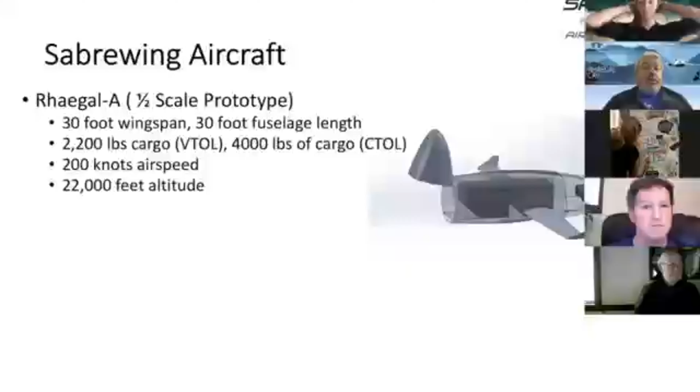I want to offer my congratulations to Dr. Roper and his team for achieving this revolutionary rapid contracting and prototyping method to bring industry and DoD together to develop this new exciting technology with both military and civilian applications. This technology will have great benefit to the needs that we have in Alaska and the Arctic, where conventional aircraft, vehicles, and vessels oftentimes can't operate.

Agility Prime is part of our Defense Department's long history of turning futuristic ideas into reality. I'm proud that the federal government is investing in revolutionary ideas. Agility Prime is leading the way.

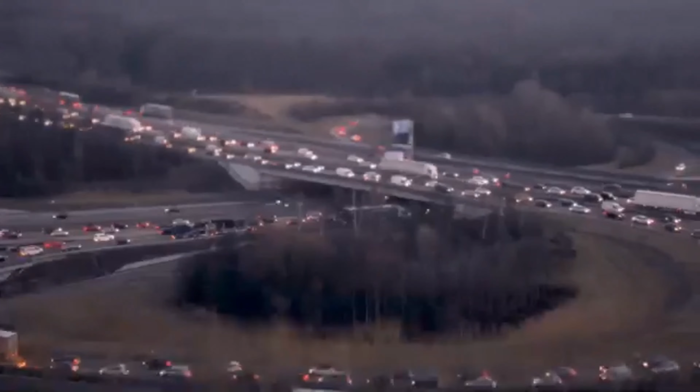This launch of Agility Prime is so exciting. This technology has the potential to make vertical flight more affordable and more widely available. And with the encouragement of the U.S. Air Force and the entire federal government, American companies employing American workers can gain a head start and win a fair share of this lucrative market.

eVTOLs have the same agile, vertical takeoff and landing capability as helicopters, but are quieter and should cost much less to operate because of their electric motors.

We are becoming a trusted innovation partner in commercial tech. I could not be prouder of this initiative. I could not be prouder of this team. And I am excited to see how quickly we can go to help commercialize this market for our nation, so that our warfighters have options they don't have today, and our nation has an economic advantage far into the future.

Innovation is a battlefield, and Agility Prime is just one way we're going to win it. Agility Prime seeks to ensure a global advantage in advanced logistics technology. Agility Prime can reduce the risk of adversarial commercial dominance resulting in military disadvantage.

As the United States Air Force looks at generating combat power away from runways, those distributed logistics aircraft must be runway independent. This new transformative capability is a promising opportunity to conduct that mission in an affordable and scalable manner. Today, we gather for Agility Prime to drive transportation innovation, lower barriers to entry, and expand our partnerships.

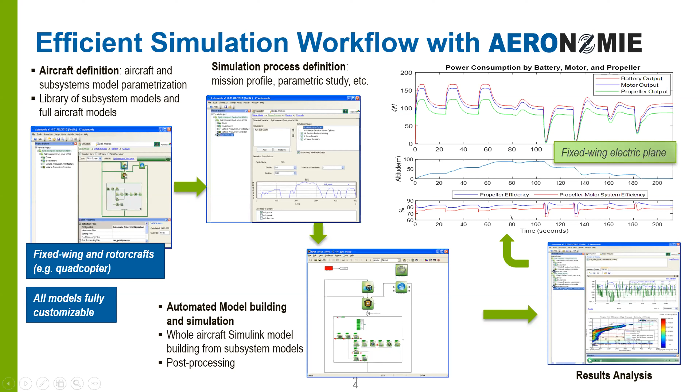In this case, for example, what is shown here is the operation of a fixed wing electric plane. On the top, you have the battery power, motor power, and propeller power, and you can see also the efficiency on the bottom plot here. We also created models for rotorcraft. In this case, it was a hexacopter.

So as I mentioned, we model each of the subsystems. For example, here we have 6 power plants corresponding to the 6 propellers and the 6 batteries.

And we can model the entire flight. This is an example of a mission, a mock-up mission at Argonne, where we go from our cafeteria and deliver sandwiches around the campus. The UAV flies with some gust winds as well, so we can predict the energy consumption, range, and things like that.

The other topic of my presentation here is our CFD capabilities. Our CFD capabilities enable the analysis of the interactions between a UAV or an aircraft and its environment.

First, this is an example of a fixed-wing UAV. It's a Pioneer, a pretty old UAV, but for which published data was available. We use a code called Converge, and we run it on high-performance computing clusters.

That enables adaptive meshing, so there's more mesh cells around points of interest, and that enables us to capture highly complex transient flow phenomena such as tip vortices.

One also very interesting aspect is that we can calculate aerodynamic coefficients, as you can see in the middle figures. This is a comparison between the wind tunnel simulation that was published and our calculations, which are just based on geometry.

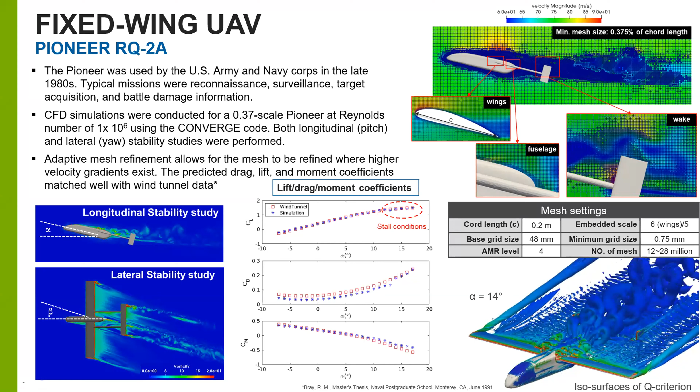And we can use these aerodynamic coefficients to run our system simulation using Aeronomie. We also develop models for rotorcraft.

So these two capabilities combined can help designers, the people who build aircrafts, predict a little bit in the simulation what their aircrafts will do, and maybe find ways to optimize them.

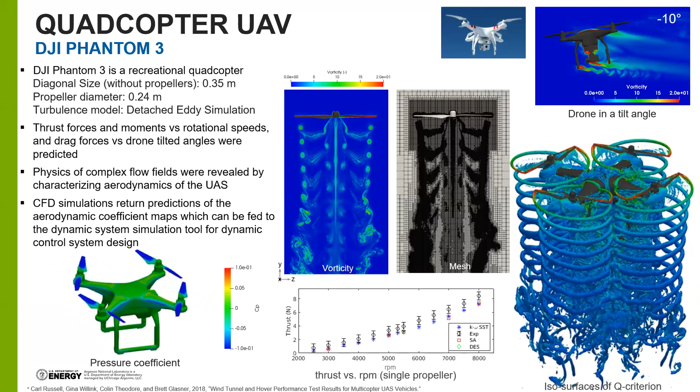Thank you. I'm not sure if the presentation will be shared, but there are contact information and papers, and I think this information, a version of this presentation, is also available on the Agility Prime website, on the Argonne page on the Agility Prime website.

Yeah, for sure. Thank you, sir.

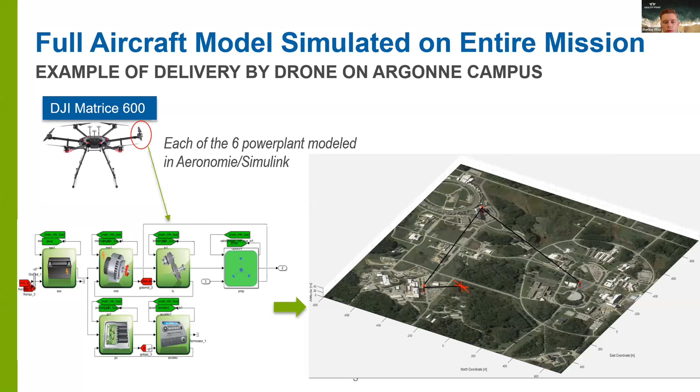That's great. Just one question from me: can you go over the pathways for folks to get involved or to use you guys for modeling work? Who can they reach out to? Does it require a government contract? Can they come in as a private entity?

No, so we're affiliated with the government, but we're not the government. So basically, it depends: if your company is participating in a call, then we can be a sub, a sub-awardee. Or in the case of SBIR and STTRs, we're just providing letters of intent, and then we establish a contract and a sponsored research partnership.

And outside of these, companies are welcome to also work with us and develop something. We can come into an agreement for a contract to perform work for these companies, and also sometimes we perform research without exchange of funds, but more with exchange of capabilities, often data. So we can find mutually beneficial research where maybe we develop new models that would benefit generally the overall community, but would also be of particular interest to a particular company, or customized to the needs of that particular company, for example.

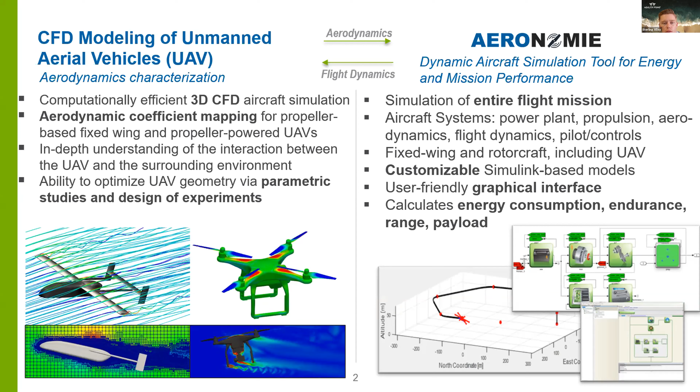Sure. Well, thank you for your time today. It was an informative presentation, and I appreciate you coming on. I think we're now going to switch over to Danielle McLean from Happy Takeoff.

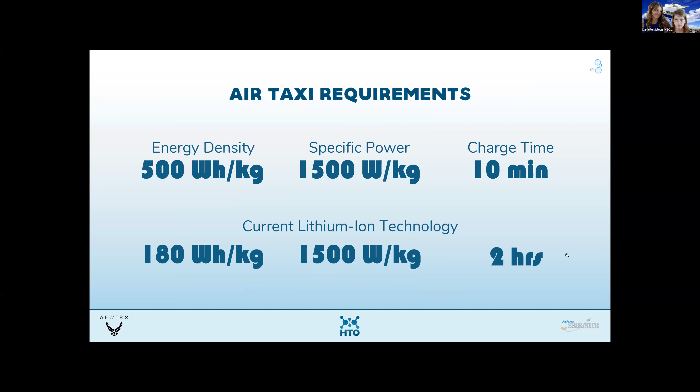Hi, at Happy Takeoff we're very interested in hydrogen, and we're going to flip through these slides pretty quick because we want to give our team members time to talk about our technologies and vision. This is why we're interested in hydrogen: lithium ion is terrific in certain use cases, but the higher energy density of hydrogen fuel enables longer flight times and quicker refueling times. We think the longer flight ranges will translate into a lower cost for implementation of infrastructure.

So when we started looking at hydrogen, we pursued this from the infrastructure perspective. There are several of our friends and other companies working on awesome hydrogen fuel cell designs, like Zero Avia, Alakai Skai, Bartini, just to name a few.

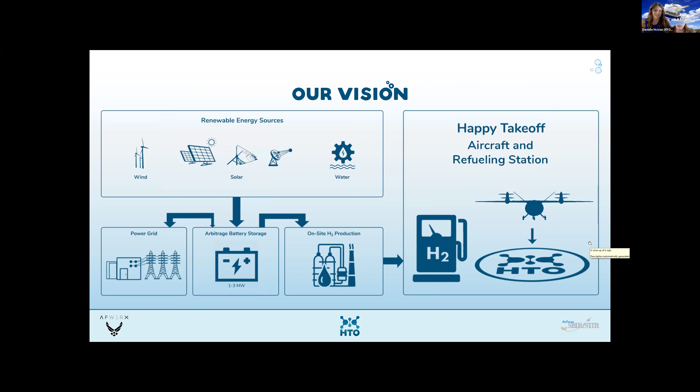So our vision is to implement captive use hydrogen, meaning we make it on site. And with that, I'd like to let Daryl Cummings talk a little bit. He's our lead aircraft designer.

Daryl, are you with us? We had trouble getting Daryl's audio working earlier, so Daryl, if you are here, feel free to cut in and interrupt me. But meanwhile, I'll go ahead and talk a little bit about PRISM.

We are so very excited to introduce PRISM. As Rachel said, we were looking at infrastructure from the beginning, trying to find what the gaps were, what needed to happen for eVTOL to proliferate everywhere. We saw that infrastructure was a really big constraint, especially when we started talking to cities and states. They weren't really too keen on the idea of putting a landing location every 10 miles or so. So we were putting our brains together trying to think how we can minimize this infrastructure needed, and what we came up with was we need longer ranges, obviously.

So then that converged to hydrogen pretty quickly. We were looking at who has this kind of vehicle that meets Uber's requirements, that meets what the Air Force is trying to do. While we're really impressed with some of the designs, like what Alakai is doing, and Zero, and Bartini, some of the other hydrogen aircraft, they're not fixed wing aircraft. This is a fixed wing aircraft. The wingspan is pretty small compared to some of the other ones, so it's got a low spotting factor. We're just really excited to announce her, and it's got a range of over 250 miles.

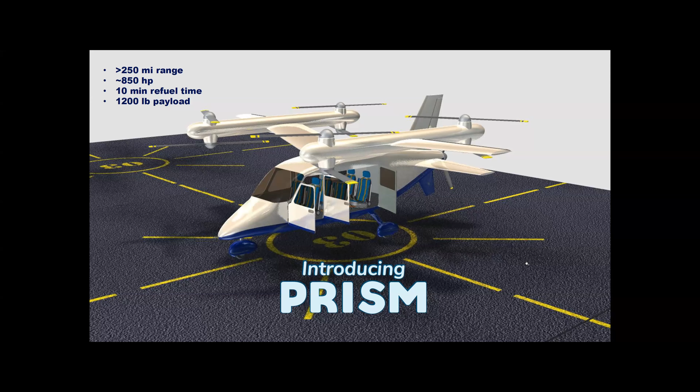I don't know, it's an ongoing kind of inside joke with us. We're just having a little technical difficulties. I think Daryl's internet is having some problems today. He's with us in spirit though, and we will hear from him soon.

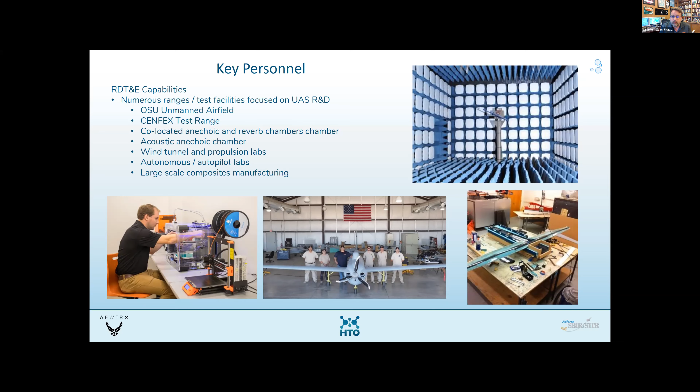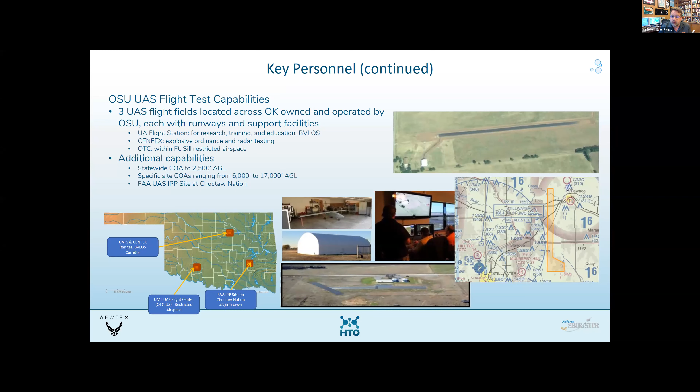This shows another example of some of our systems, but we have several flight test facilities that will be available for the program, allowing us to test at different stages of the project, including the OSU Unmanned Aircraft Flight Station, which has runway and hangar facilities, as well as a beyond visual line of sight corridor. We are partners with the Choctaw Nation FAA UAS IPP test site in Southeast Oklahoma that covers over 45,000 acres and has hosted other AAM vehicles. OSU also owns and operates a UAS test facility within restricted airspace at Fort Sill for government-only customers.

Finally, our point of departure vehicle is going to be based around our BFD platform, which has a similar 8-rotor configuration to the Prism, allowing us to quickly demonstrate the flight control and dynamic systems of the proposed platform with minimal cost and time. Once this is demonstrated, we can easily scale up to larger platforms as program requirements mandate.

Thank you, Danielle, thank you Dr. Jacob. I don't know what we're like on time, but if we got that done in 10 minutes, I'm really proud of us. Yeah, for sure.

Thank you, Danielle, I just had a little bit of question on your STTR collaboration with OSU. Is the BVLOS drone hydrogen as well, or? It can be, yeah. We currently have a hybrid system that's using both fuel cell systems that are hydrogen based, as well as other hybrid technologies, so we can quickly adapt to that.

Sure, thank you. Unless there's any other questions from the Q&A, let me check. Yeah, so I have one from Bill Kleinbecker: is OSU involved with the 5G early sites, anything to talk about there? Nothing that I can share at this time.

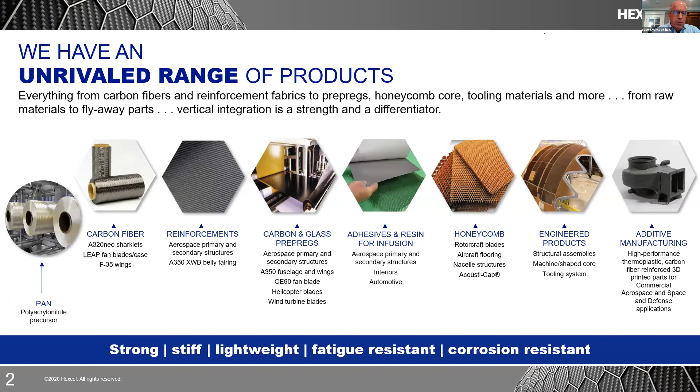So Hexcel is, as I mentioned, an integrated material supplier. We produce everything from the pan precursor, carbon fiber, reinforcements, a variety of woven fabrics and prepregs, adhesives and resins, and a number of other capabilities, engineered products. We also have an activity in additive manufacturing that I'll explore. We also are the largest supplier of honeycomb core in the world.

In terms of the US, we are headquartered in Stamford, Connecticut, and then have a number of sites that I'll go over briefly. I am based in Salt Lake City, which is our largest operation in the US. In Salt Lake, we produce all of the carbon fiber and all of our aerospace prepreg materials. Going from left to right, up in Washington State we have engineered core facilities - this is a facility that helps shape the honeycomb core to the shape that you need for your application. Then an engineered structures group just outside of Seattle that can produce all types of composite structures.

We have our R&D facility in Northern California. We produce our honeycomb in Arizona. We produce our industrial prepregs, mostly for the wind energy market, in Colorado. We have full weaving and fabric capabilities in Seguin, Texas. We develop our pan precursor in Alabama. We also have another engineered core facility in Pennsylvania, headquarters in Connecticut, and our additive manufacturing operations are also in Connecticut, and a group up in Massachusetts that deals with RF and electromagnetically tuned materials.

So when we look at the UAM industry, there are business requirements and customer requirements there. And what we find is that this industry needs higher build rates than the aviation industry does today. If the industry fully develops, it'll start to approach automotive build rates.

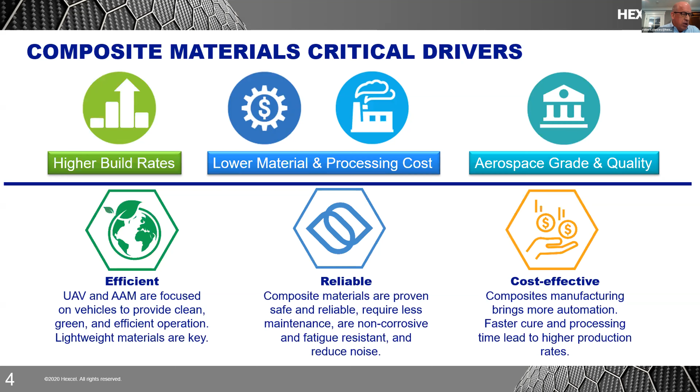We talked about the different propulsion methods, electric, hydrogen, but all of those will need a lightweight structure in order to be most efficient. These structures need to be reliable, and composite materials are reliable and have been used in the aviation industry for decades. But they also need to be cost effective and have the ability to scale to the large volume production that is required.

So let me just talk about some of the different technologies that we provide. We are the largest producer of aerospace grade carbon fiber in the world. We kind of bucket these in three main categories.

High strength, lower cost fibers we designate as our AS fibers. Then intermediate modulus fibers, those are primarily used for primary structure in aerospace today, designated with the IM designation. And then high modulus, which have very high tensile modulus but a little bit lower strength generally, used for a lot of satellite and space applications.

All of these carbon fibers are produced, including the precursor, in Alabama, and then the carbon fiber production in Salt Lake City.

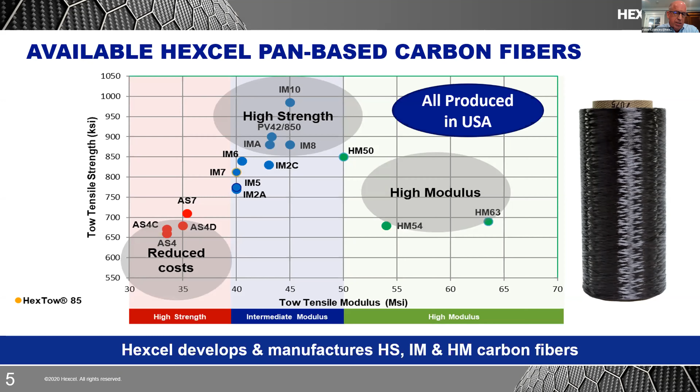We've been involved primarily in the aerospace industry, but have been quite involved in the automotive industry, especially for Formula One racing and those types of activities. We've worked with the automotive industry for many years to be able to look at the kind of production volume rates that they're used to.

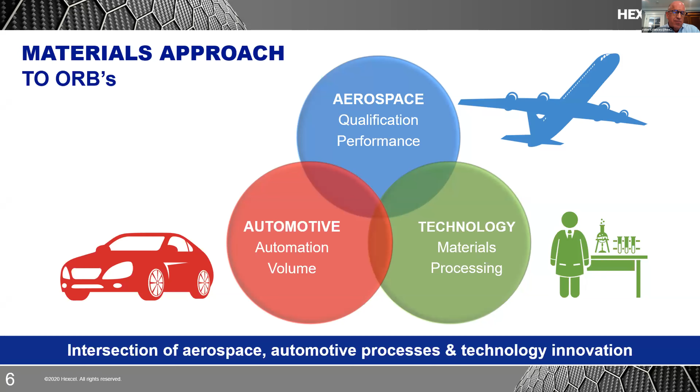We've been very involved in aerospace. We understand the qualification, certification, and performance requirements for aerospace. And we have a very active technology R&T activity. So what we see for the UAM industry is really combining all of these, the aerospace quality with the automotive rates, and having a robust research and technology focus to be able to develop the materials required for this industry.

If you look at composite materials today, they're primarily thermoset prepregs. Thermoset materials are a plastic resin that requires temperature to set, and once it's set, it's permanent. That's primarily what the aerospace industry uses today.

But there's been a lot of interest in thermoplastic materials because they don't require the type of processing equipment you need for thermosets. There's more opportunity for automation and faster rates. So we formed a partnership with a French materials chemical company, Arkema, a couple of years ago to develop really world-class thermoplastic prepregs.

We're actively working on that, and we'll actually have a webinar next week on that topic with thermoplastics, so stay tuned for our continued efforts in thermoplastic. Our fibers have some unique advantages for thermoplastics, and our fibers, whether thermoplastic or others, are generally the fibers used in these thermoplastic prepregs.

As mentioned, in our involvement with the automotive industry, we've developed a lot of more automated and faster processing materials. So we have materials well suited for automated placement machines, liquid composite molding, quick cure composites, out of autoclave composites, additive manufacturing, compression molding, pultrusion, thermoplastics, welding, and joining. We have all of those capabilities within Hexcel.

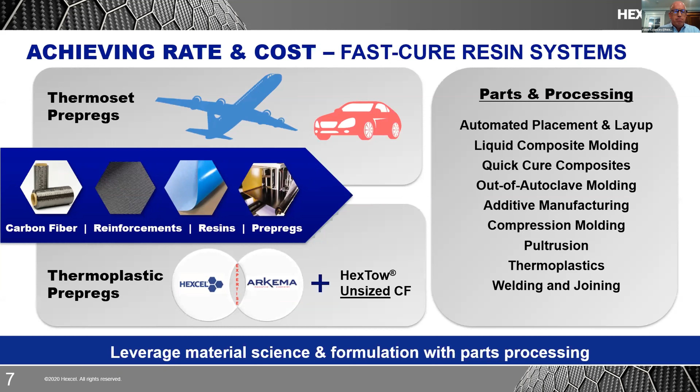We're also the largest producer of honeycomb, and one of the unique advantages we have is that we've developed honeycomb materials able to dampen acoustic vibrations. Our honeycomb materials are primarily used in engine nacelles because the honeycomb material dampens the noise coming from the engine, which is good for those outside the airplane, but also good for the passengers inside.

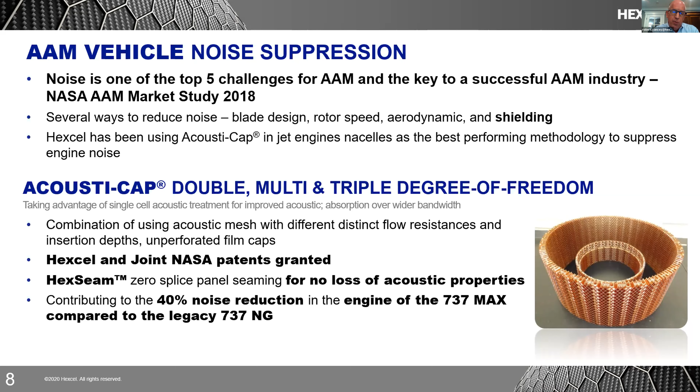We're actively working with our expertise in acoustic absorption materials to find ways to lower the acoustic signatures of advanced air mobility. We know that's a major issue that needs to be solved in order for these vehicles to be used widely in urban environments.

I mentioned additive manufacturing. We produce additively manufactured parts in our Hartford, Connecticut facility. This uses an SLS process, selective laser sintering. It uses a high performance thermoplastic powder, PEKK, provided to us by Arkema, loaded with milled carbon fiber, which provides extra strength and stiffness to the material. It has some advantages in terms of electrical conductivity, and we solely provide these parts to the aerospace community.

We have active partnerships with most of the aerospace OEMs and the DoD. These materials are certified for flying and are flying on vehicles today, and we're actively continuing to develop the design allowables for the newest generation. We have a current activity funded by the FAA to further qualify and certify this material. We have customers today in the orb industry and look at this as an exciting technology, especially to replace metal castings or for very complicated geometries where tooling costs could be prohibitive. This is an easy way to get those types of geometries produced in a lightweight fashion.

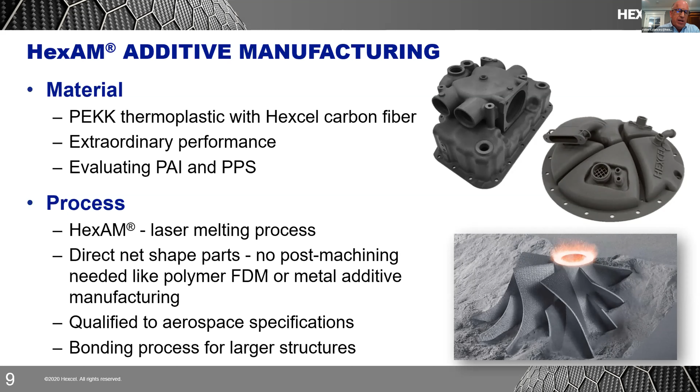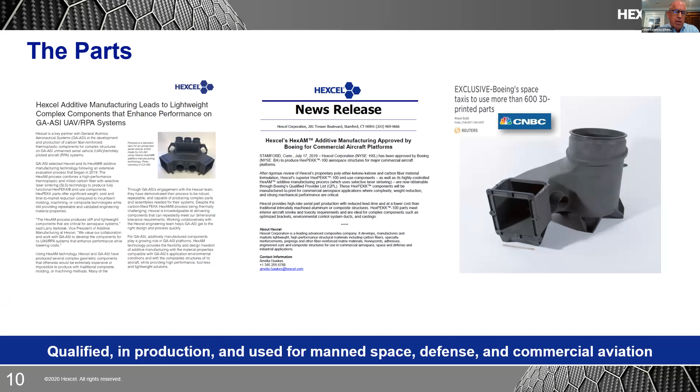There's some information on our website, I'll just point out some highlights. We've been actively involved with General Atomics over the last few years on their UAV systems and have a published case study with them. Another news release came out last year on being fully qualified for Boeing Commercial, and we've been in the press on a number of things, including an interview on CNBC. So it's a qualified additively manufactured process that's in production and used for manned space, defense, and commercial aviation.

If you look at primary and secondary structures, they are generally stiffness driven and crashworthiness driven. So thermosets are traditionally used there, but we've developed a lot of quick cure thermoset materials and out-of-autoclave materials so that production rates can be satisfied. Generally they use an intermediate or high modulus fiber, and thermoplastics is also an emerging area of interest for that.

If you look at the rotor blades, they need to be damage tolerant. Generally there's braiding or fabrics used with intermediate modulus fibers, and infusion resins are an effective way to manufacture those blades at scale. If you look at frame structures, they're stiffness and strength driven, and pultrusion methods are excellent because they're low cost and can be produced in large volumes.

If you look at the interior, they need quick cycle and reduced labor technology. We just recently introduced a new thermoset resin system that meets the flame, smoke, and toxicity requirements by the FAA, so it's suitable for use in interior systems. For brackets, ducting, and complex shape components, additive manufacturing or molding infusion processes are applicable. In terms of parts manufacturing, you need quick cycling, reduced labor, and tooling, so things like liquid composite molding, compression molding, and infusion are appropriate there. And for engines, nacelles and ducting, our honeycomb acoustic suppression materials apply.

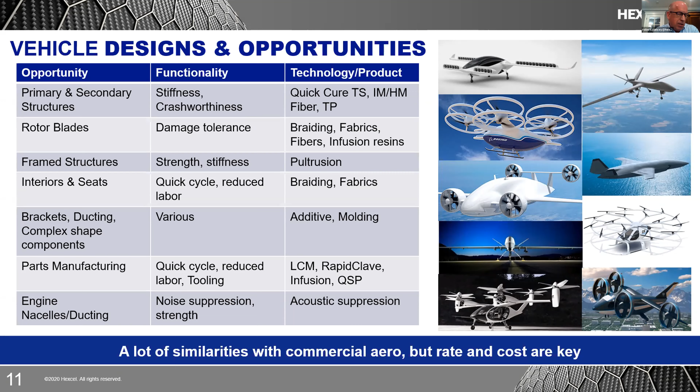There's a lot of similarities between the orb industry and the commercial aero industry, but rate and cost are key. So we continue to be actively involved in developing materials and processes to meet the rate and cost requirements of the orb industry. In summary, materials challenges for the orb industry are that different solutions are available for different missions and different mechanical property specifications. So if it's an unmanned system, it has different requirements than a manned system.

Hexcel is a global leader in advanced composite technologies in aerospace and automotive. We have a wide breadth of material and engineered structure solutions for the orb industry. We can provide the materials, we can provide the structures, we can help with the engineering, we can provide all of your composite materials structures needs. We're happy to engage with any of you out there developing concepts who need a strong, trusted domestic partner to provide your composite materials solutions.

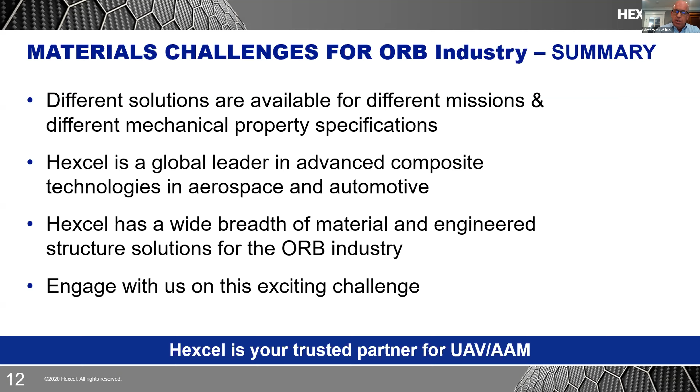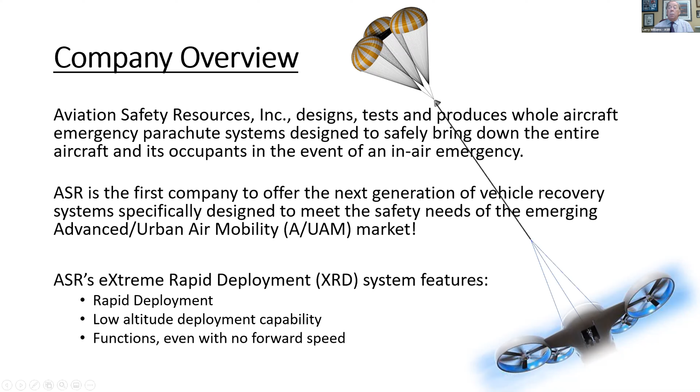It features a very rapid deployment. It also will work at a very low altitude, and it will function quite well even if there is no forward speed to inflate the parachute canopy.

As everyone knows, there's over 300 different vehicle designs underway right now. Our system is designed to bring a level of safety to these vehicles and give a means of recovery, especially in the VTOL environment. There's no other system out there today that'll work in that VTOL environment as efficiently. We are also working with both unmanned systems as well as advanced air mobility and manned aircraft.

Our products are also lighter weight. They have a lower cost and lower operational cost with a repack cycle of 15 years that lowers the total cost of ownership over the life of the system. Our XRD system is the essential recovery system specifically designed to increase safety, and by increasing safety, we feel we can lower the design, testing, and operational cost, and ultimately lower the risk associated with these new vehicles.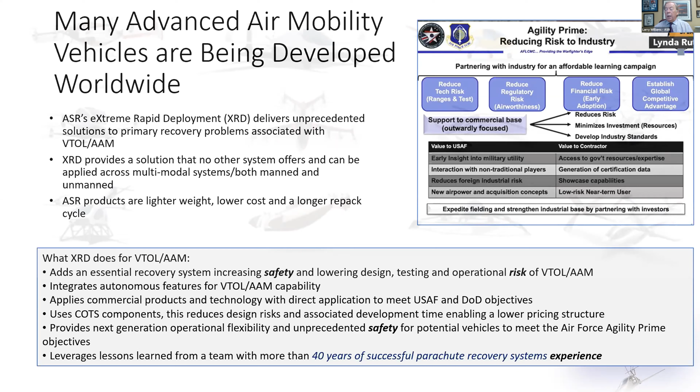So we integrate various components that we've used for years, and we've applied commercial solutions along with brand new technology to help bring about a new type of vehicle recovery system and give the operational flexibility needed in this urban air mobility or advanced air mobility market, in line with the Agility Prime objectives and what the DoD itself is looking for. We've got a team of people with over 40 years of experience developing recovery systems, and we've taken advantage of that experience to develop what we call the next generation of recovery.

There are parallels with what we're doing and what you see, for example, in automobiles and how airbags ended up really changing the injury mechanisms and safety elements associated with automobiles. Airbags became mandatory around 1998, and the National Highway Traffic Safety Administration estimates that by 2015, almost 45,000 lives had been saved with the use of that technology.

Now, if we transfer that over and look at aviation, the baseline aviation accident rate for general aviation airplanes from 2001 to 2005 was 7.97 accidents per 100,000 flight hours. By 2016, there was a 57% decrease in that accident rate down to 3.45 accidents per 100,000 flight hours. What this means is that technology matters.

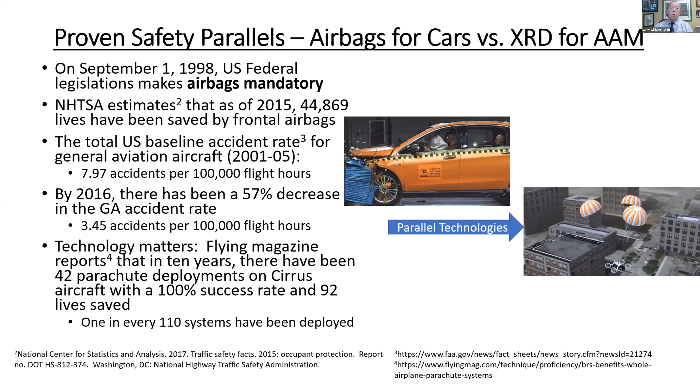Flying Magazine did an article a few years ago that said in 10 years, there had been 42 parachute deployments on Cirrus aircraft with a 100% success rate and 92 lives saved. And incredibly, 1 out of every 110 systems that have been installed have been deployed.

So we feel like aircraft designers need the solution that we bring to the table today. For example, we talked about automobile accidents. There's nearly 15,000 fatalities in automobile accidents across the country every year, but that's become socially acceptable. We accept that level of risk. But if you look at it, even just air taxi accidents, which average only 18 fatalities a year, every accident makes national news, sometimes international news.

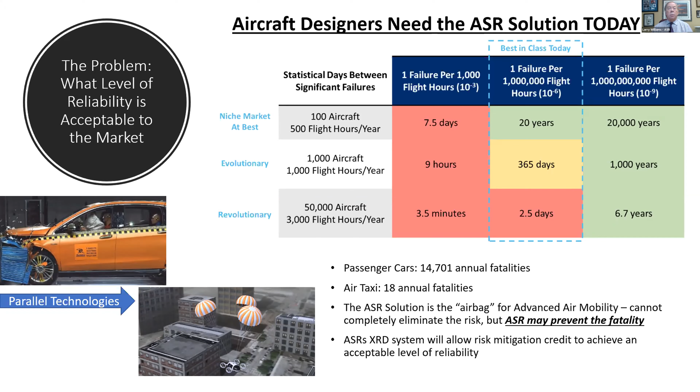So our solution is designed to help the market in advanced air mobility. We can't prevent the accident, but we may be able to prevent the fatality by giving another level of safety if something goes wrong. And in the design, you could use the parachute recovery system as risk mitigation credit as you're designing the vehicle from a safety standpoint. Our concern is that if there were to be an accident in the early stages of development of the entire program, it could significantly delay the program completely.

Look at the impact of the Virgin Galactic accident that occurred. Look at the impact to Uber on the self-driving cars and the accident in Arizona that killed a woman on a bicycle. And more recently, the Kobe Bryant accident, of course, was worldwide coverage.

So we feel like we can offer an integrated solution that can be built into the design of the vehicle to give another outcome by allowing a parachute recovery system to safely bring down the vehicle in the event of an in-air emergency.

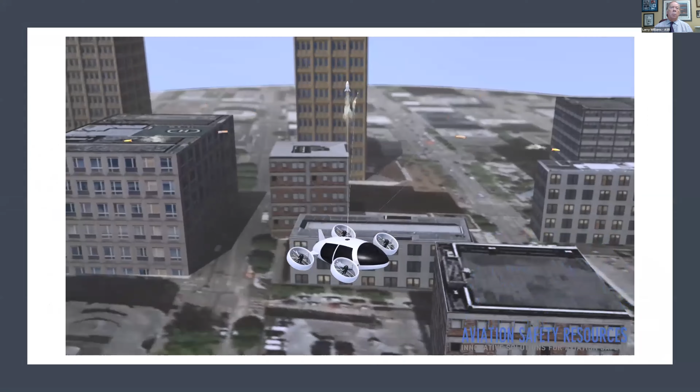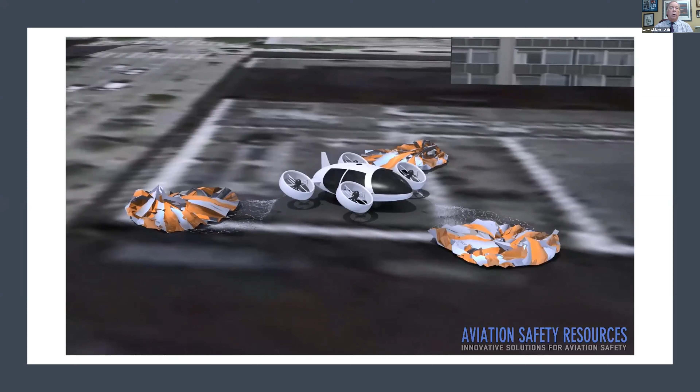Now, the way our system works is we use a retro rocket to slow the descent of the vehicle, and then we deploy multiple small parachutes, and we've calculated and figured out a way to inflate the parachutes on deployment. Therefore, we can deploy very, very rapidly. We can recover the vehicle in about 100 feet, and in less than about 2.5 seconds. So technology really matters.

Conventional recovery systems have been around for nearly 4 decades. More than 500 lives have been saved with these systems, but they will only work effectively with forward speed to inflate the parachute canopy. If you don't have forward speed and you're in a vertical takeoff or vertical landing configuration, the only way to inflate the canopy is with altitude loss. This is not a capable solution in this environment.

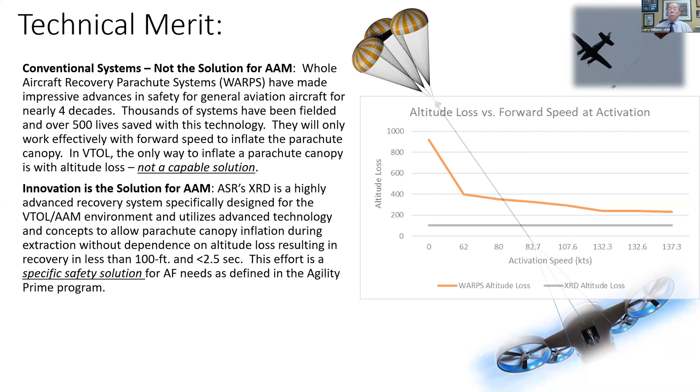So what we've done is we've specifically designed a system that utilizes advanced technology and concepts to allow us to inflate the canopy during the extraction. Again, we can limit the altitude loss to less than 100 feet in about 2.5 seconds. So this is a very specific safety solution that the Air Force needs as defined in the Agility Prime program.

So in summary, we feel like we have advanced technology which will contribute to a mission need under this Agility Prime program. And by equipping these vehicles with this onboard safety system to mitigate the risk, it saves the assets, not only in the air, but also reduces the risk on the ground. We can accomplish this recovery and bring down that vehicle and its occupants where literally they can release their harness system and walk away.

So we're a primary solution for the advanced air mobility market. We've established a relationship with Agility Prime, and we're looking for other vehicle OEMs that want to work with us to incorporate this important safety feature into part of their design. So with that, I'll close, and I'll be happy to answer any questions about our system and what we do.

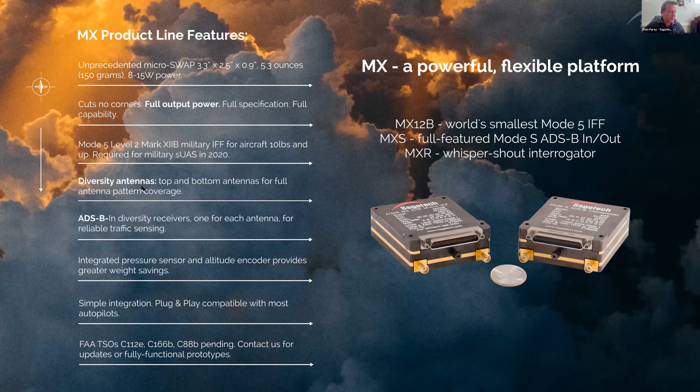We have a third version of this, which is sort of the inverse—it's a whisper shout interrogator that can interrogate other aircraft transponders. That combination of capability in a single platform makes it ideal to create a full detect and avoid solution for UAS, for UAM, and for AAM aircraft.

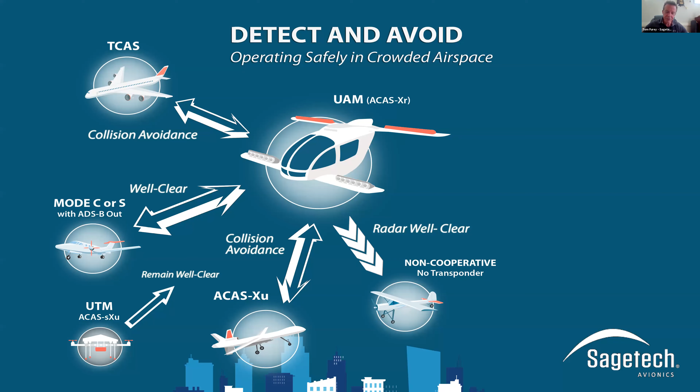So our MX platform is perfectly positioned to enable us to create a very, very low SWaP solution integrated with a few other components that provides the ability to detect and avoid all those different types of traffic that we described in the previous slide.

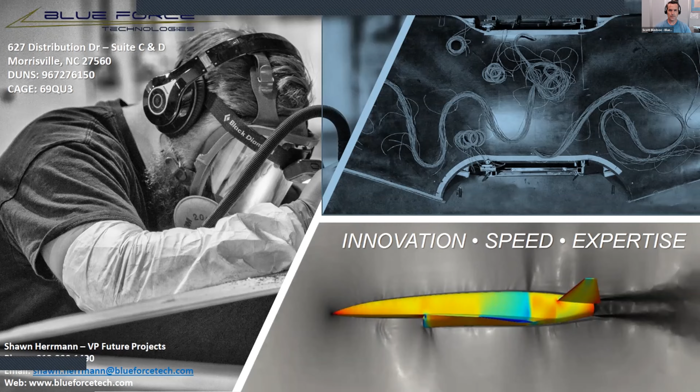So Blue Force, at our heart, we are an aerostructures company with a composites emphasis. We love helping companies accelerate their programs by building large structural assemblies for them. On top of that, we've added over the last few years aircraft design capabilities. We actually do full configuration design work and aerodynamics. We've got both an external aero capability as well as propulsion flow path design for high-speed vehicles.

And so currently, we're actually on 3 SBIRs with AFRL, either as a prime or a sub, on everything from electric VTOL aircraft all the way up to helping a company lay out propulsion flow path for a Mach 5 vehicle. So we like to say we cover the entire Mach range from 0 to 5.

We've been in business 10 years. In that time, we've completed 75 unique projects or more for 45 customers. Our headcount's about 80, including about 20 engineers. We're still growing as an essential defense business. We've been able to keep it together through COVID and actually add a few people this year. So very fortunate for that.

Back in the good times, there were over 1,000 aircraft flying our parts. I'm sure with the airliners being grounded, that takes that count down, but we've delivered thousands of instances of flightworthy structure through those 10 years, including 2 commercial space OEMs engaged in the space tourism business, who rely on us for primary structure.

So one of the things we've developed internally - we do a lot of work on one-off rapid prototyping for people, and we've developed a fully digital advanced rapid prototyping system. I'll talk more about that in a minute, and I'll give project examples where we've applied that.

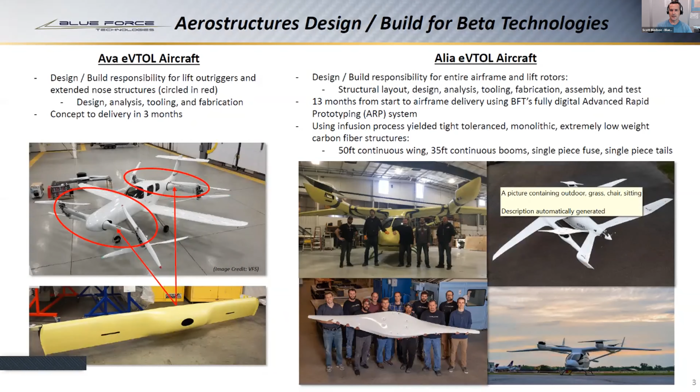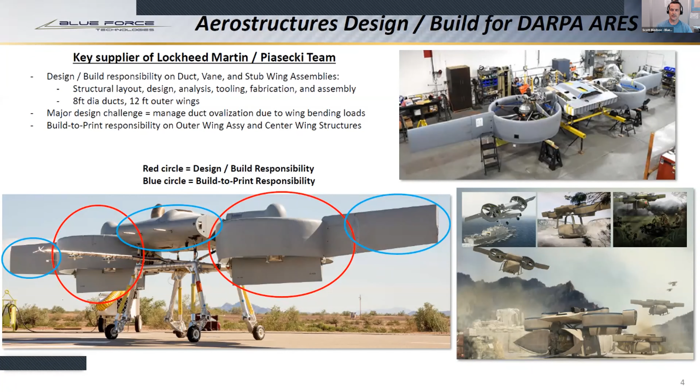At the same time, this was a one-off rapid build program, so we couldn't go to the most exotic materials out there. So it was a trade-off between tooling and manufacturing techniques and what we could achieve stress-wise and stiffness-wise. So yeah, another good example. If you go to the next slide.

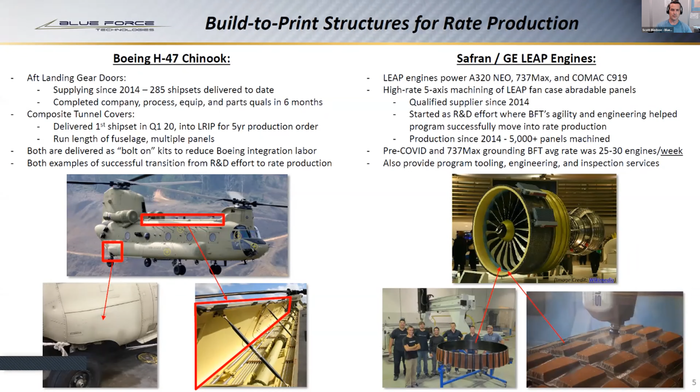And then likewise on the LEAP engine, there is a set of composite structure that's a very light gauge composite carbon fiber skin with honeycomb core that we machine those in production. And I think 2 years ago, we did over 800 ship sets. Obviously this year, with airliner business being what it is, we've come down in our volumes, but very proud to be on their team as well. Next slide.

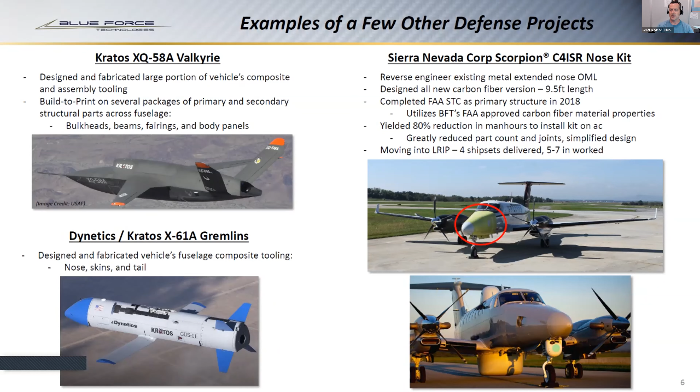On the right side, this is an example of an FAA certified primary structural application. We're teamed with Sierra Nevada, who have a nose extension they put on the King Air. It was a metallic solution with a high part count and high labor time. We came in 2015 and helped them design a much lower part count, more highly integrated, and better looking composite piece of structure, reducing the time required to put a nose modification on the aircraft. We went through STC with them, did all the heavy lifting on stress analysis, worked with their DERs, and as a team got that completed at the end of 2018.

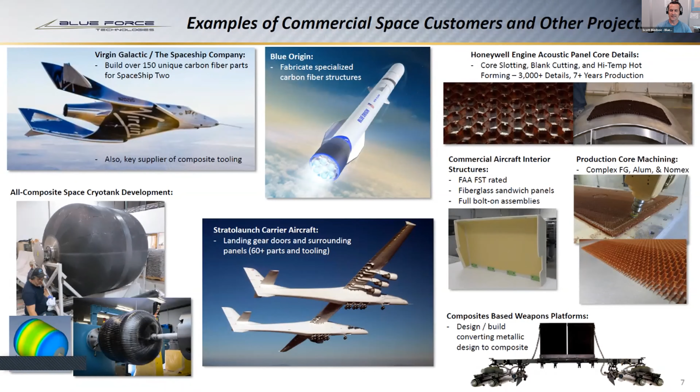We're building landing gear doors for the Stratolaunch aircraft. Normally you might not think landing gear doors are a big deal, but it's the world's biggest airplane, so it has like 64 landing gear doors—that's kept us busy for quite a while. So yeah, I think that's a good overview of what we do.

If you go to the next slide.

I'd like to wrap up by saying thanks again to the Agility Prime crew. We're happy to be a key teammate for anybody out there who's got a program coming to fruition, and happy to be a part of your success. I'd take any questions you might have.

Thanks, Scott. Let me just look and see if any questions came in. No, none so far, so I think we'll leave it there and switch over to Chris.

I appreciate you coming on—that was very informative and great to see all the work you guys are doing. Thank you.

Chris, last but not least. All right, let me go ahead and share that slideshow and swap between screens. All right, does that look good? Yeah, we got you. All right, fantastic.

So thanks everybody. This is a great analogy for building an aircraft—typically the last thing anybody thinks about when building an aircraft is their communication system, so it's fitting that I take the last spot as we move forward. Chris Wallauer, sales engineer with Persistent Systems. I could talk about this particular subject for several days, so I hope you're all ready for that. No, luckily for you guys, I've got 10 minutes.

What I'd like to do is focus a bit on the technology and get through it so that if there are questions, we can walk through them. What do we provide? We provide a network data link. We are a MANET network, a mobile ad hoc network, meaning our devices talk to each other—everything in the network is just like everything else.